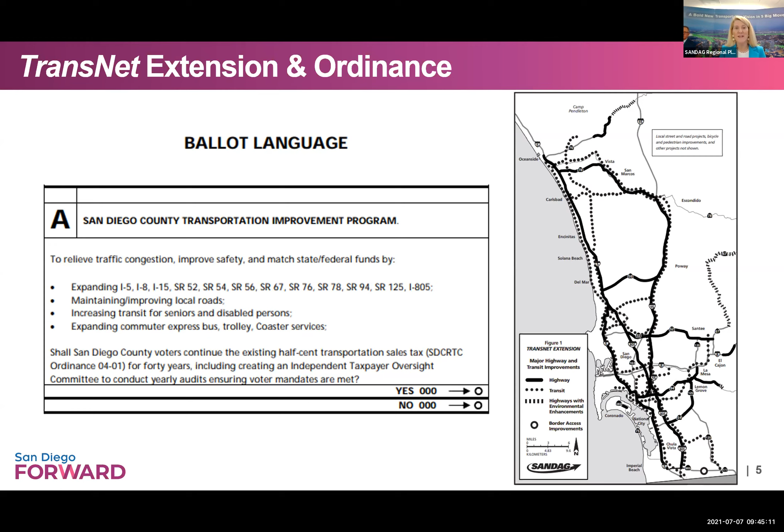We have completed a whole lot of projects, and maybe some of you have had a chance to look at our TransNet story map. More than 650 projects have been completed, and this is a combination of highway improvements, transit improvements, our environmental mitigation program, active transportation projects, and grants to our local jurisdictions for smart growth and for active transportation, as well as services for seniors and disabled persons. So 650 projects just since the TransNet measure was approved.

As you all know, the TransNet funds have many elements to it. Today we are going to focus on the major corridor capital projects and share with you how what's in the TransNet ordinance compares to what we're actually proposing in the 2021 regional plan. As Hasan mentioned, we're really talking about a transformational system approach to the region's transportation challenges, as opposed to a set of projects. And this is largely because things have changed dramatically in the region. Ray Major is going to share with you some of the trends in land use and how population projections and our revenues are some of the major changes.

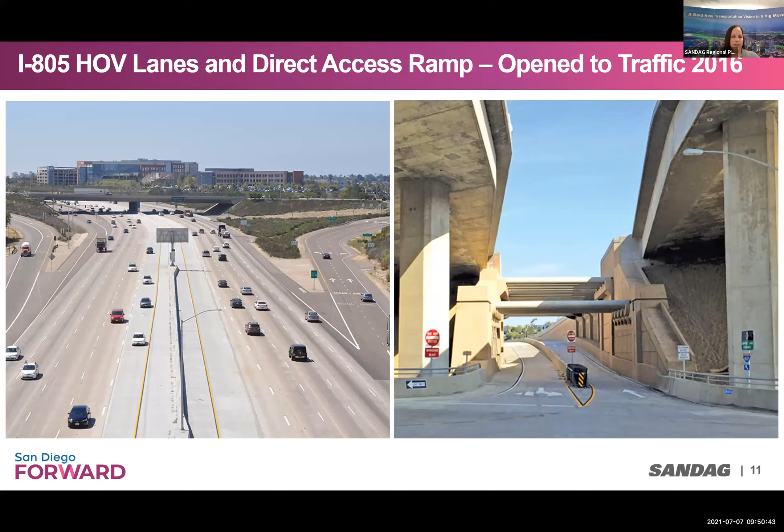These facilities provide new transportation choices for people who live, work, and play in the Golden Triangle area, which is also a leading employment center in San Diego County.

This picture is of the 52 extension, which was completed in 2011. Some of the great things that resulted from this project include reduced congestion on I-8, Mission Gorge Road, Mast Boulevard, and Prospect Avenue. Reduced congestion on I-8 as much as 20%, direct access to job centers from East County communities, improved mobility by increasing roadway capacity, and travel time has been reduced by approximately 10 minutes.

3 projects along the SR 76 corridor have improved travel times for commuters in North County. The west segment was completed in 1999, and the middle segment, completed in 2012, reconstructed the 2-lane highway between Melrose Drive and Mission Road into 4 lanes.

The east segment, completed in 2017, widened SR 76 to a 4-lane highway between Mission Road and I-15, improved the SR 76 I-15 interchange, and upgraded the park and ride at Old Highway 395.

These projects along the 76 corridor included physical improvements such as widening the roadway, expanding the park and ride, and improvements to existing on-off ramps to improve traffic operations and efficiencies.

Safety enhancements, which included creating a median barrier, realigning the curves, and widening the shoulders. Environmental benefits of these projects included facilitating wildlife movements through animal undercrossings, mitigating stormwater runoff, and restoring and revegetating habitat areas.

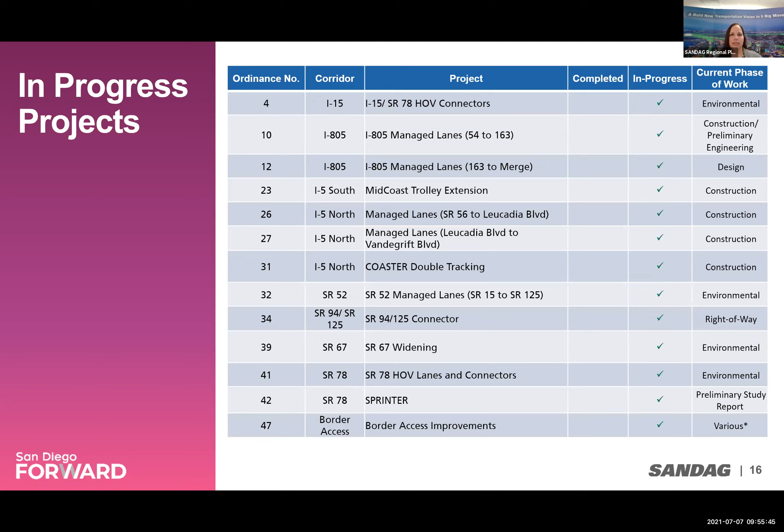The first project is, of course, the Midcoast project, which you may have heard of. We are very excited to see this project opening at the end of the year so that trolley riders will be able to ride the trolley from the border to UCSD and anywhere in between.

This picture shows the aerial guideway with the elevated station and tracks. This picture, a little bit more south along the I-5, shows the progress at Noble Drive trolley station along with the parking structure. On a quarterly basis, staff brings updates for the Midcoast project to the Transportation Committee and the ITOC. These presentations provide an update on the construction, schedule, and budget, and provide great pictures like this one.

Build NCC includes the restoration of the San Elijo Lagoon. The restoration project is being made possible by the TransNet EMP, or Environmental Mitigation Program, that I spoke about earlier, coordinated with the San Elijo Lagoon Conservancy and resource agencies.

Restoration will enhance the lagoon's wetland and upland areas, improve tidal flushing, and includes beach and sand replenishment. Improving coastal access is a critical component of the NCC program. Build NCC will include new east, west, and north-south bicycle and pedestrian trails in and around San Elijo Lagoon.

Caltrans and Sandag are extending an HOV lane on I-5, one in each direction, from Lomas Santa Fe in Solana Beach, to State Route 78 in Oceanside.

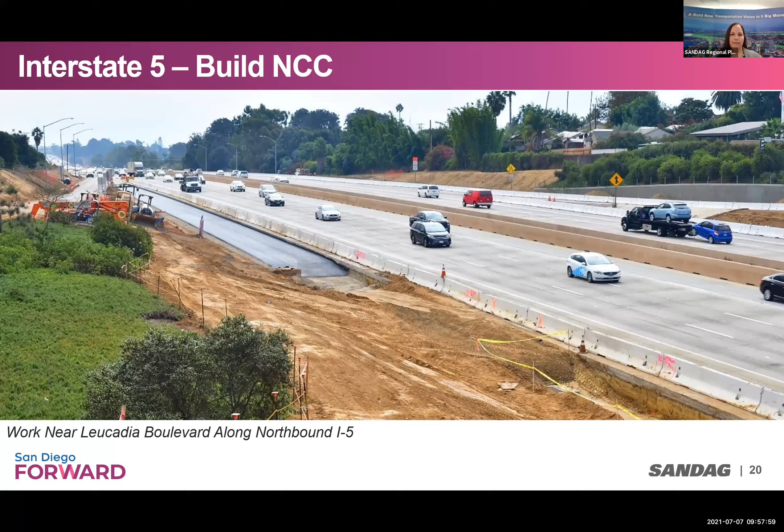Some projects within the North Coast corridor have already been completed. This includes the I-5 Genesee interchange and widening project. As shown in the first picture, this project replaced the existing 6-lane Genesee overpass with a 10-lane structure able to accommodate current and future traffic demands. Along with replacing the overcrossing, the project widened the freeway access ramps, added an auxiliary lane northbound on I-5 between Genesee Avenue and Roselle Street, and constructed a new separated bike-ped path.

The second picture is of the Gilman Bridge over I-5. In partnership with Caltrans and UCSD, this bridge connects Gilman Drive to Medical Center Drive, providing a vital link between the west and east campuses of UCSD.

On a quarterly basis, staff brings updates on the I-5 North Coast corridor to the ITOC, and these presentations provide updates on construction, schedule, and budget, along with pictures and current project statuses.

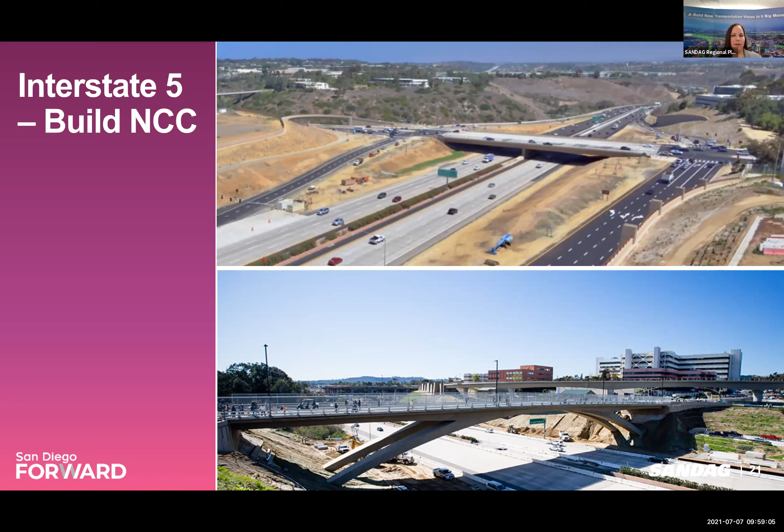The Los Angeles, San Diego, San Luis Obispo Rail Corridor, referred to as the LOSSAN corridor, is the 60-mile segment of passenger rail in San Diego County, stretching from the Orange County line south to San Diego's Santa Fe Depot. The segment passes over 6 coastal lagoons and Camp Pendleton, and goes through Oceanside, Carlsbad, Encinitas, Solana Beach, and Del Mar before reaching its final destination in downtown San Diego.

As of March 2021, approximately 45 miles, or 75% of the corridor, is double tracked and in service, with 7 miles of double tracking either in design, environmental review, or construction.

This slide shows a snapshot of the LOSSAN story map, highlighting projects that are complete or in various stages of development. Each year, more than 2.8 million intercity passengers and 4.4 million commuter rail passengers travel the LOSSAN corridor. In addition to double tracking, other infrastructure improvements include bridge and track replacements, new platforms, pedestrian undercrossings, and other safety and operational enhancements.

As a companion to the I-5 freeway, the San Diego segment of the LOSSAN corridor plays a critical role in the movement of goods and people within the region's North Coast corridor.

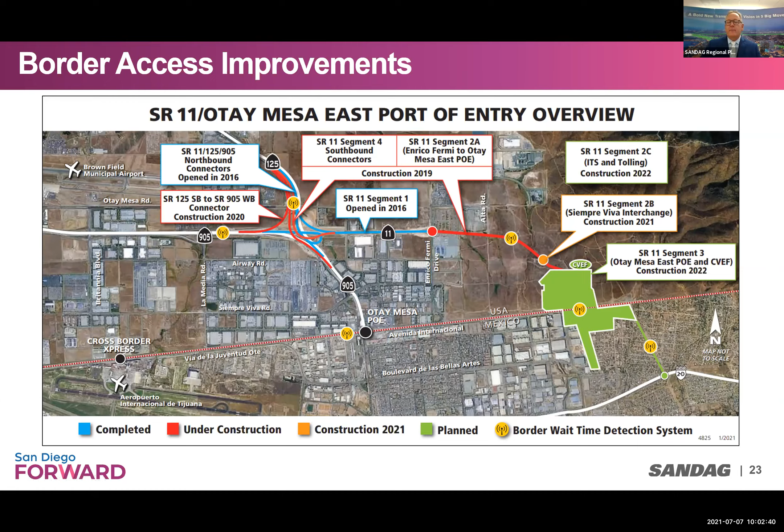650 projects completed under TransNet. I think that's actually really amazing. And when you think about the highlights she went over, we've done a tremendous amount in this region. As you can see, a lot of them were capacity-adding projects. The reason for this is that when we looked at our transportation network 20 years ago, one of the things we were judged on by the state of California was something called level of service, which had to do with how fast or how much congestion there was on the freeways. Our job was to mitigate that, and the easiest way to do that is to widen freeways. That's what you saw a lot of happening over the last 20 years.

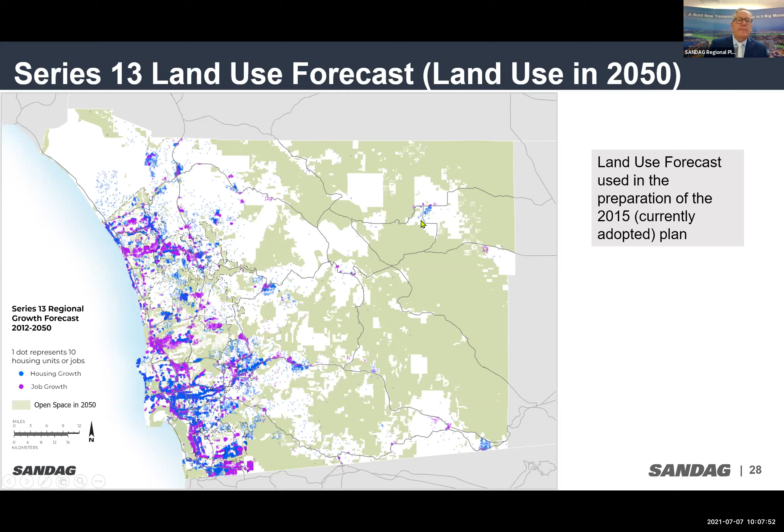The important thing to note here is the growth that we believed was going to happen along the 8 corridor, and the growth we believed would happen in the area represented by Ramona, a little bit north. You can see it's still spread out, with pockets of growth out in the East County.

Series 14, the land use forecast we used for 2021, looks completely different. This is important because we take the land use from each jurisdiction within San Diego, working with the planning departments, taking the land use they're proposing, and aggregating all of that. That's the beginning of what our forecast uses to figure out where people are going to live. These two maps compare Series 10, from TransNet 2, to Series 14, the one we're looking at for the future.

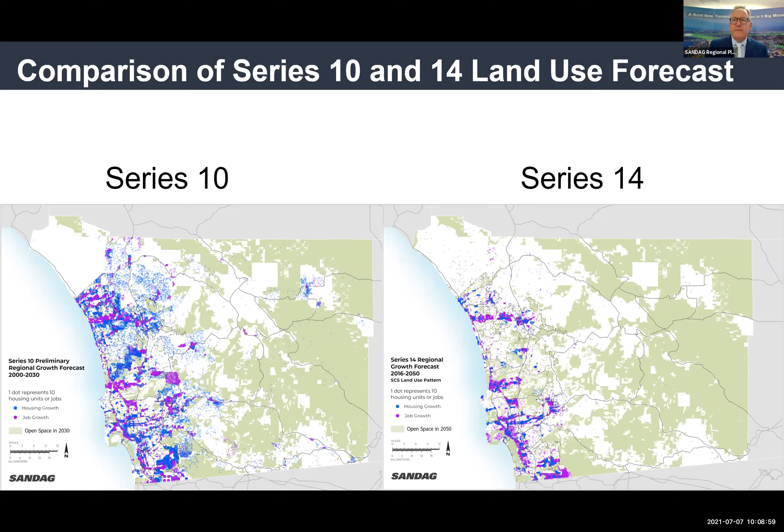What you see is very little growth in the East County in the Series 14 map, with much more growth concentrated in existing areas. The important thing is that a transportation plan conceived 20 years ago in terms of what would have been the right projects probably isn't the right set of projects now, given where we believe growth is going to be. There are two completely different land use patterns requiring two completely different solutions to transportation.

There are some other things we need to take a look at too. Back in 2002, when we originally did the TransNet extension, we believed we'd have around 4.45, about 4.5 million people in the region by 2050. This is an extrapolation from the forecast, since it only went out to 2030, but using the same algorithms, we'd have about a 4.5 million population.

And we need fewer housing units to house those people. So the region is not growing as fast as it was in the 2000 forecast, and it's not spreading out as far geographically. These are the forecasts now that have been updated. I wanted to share those with you so you can see that for planning purposes, we're really planning for a completely different region.

As Hasan mentioned, our annual TransNet revenue forecast done in 2002 was used for the measure passed in 2004 and implemented in 2008. For those first couple of years, that 2002 forecast was very accurate, basically right on. So economists and everyone else here at SANDAG at that time felt pretty confident this forecast was reasonable. They had a total of $14 billion expected from this half-cent extension.

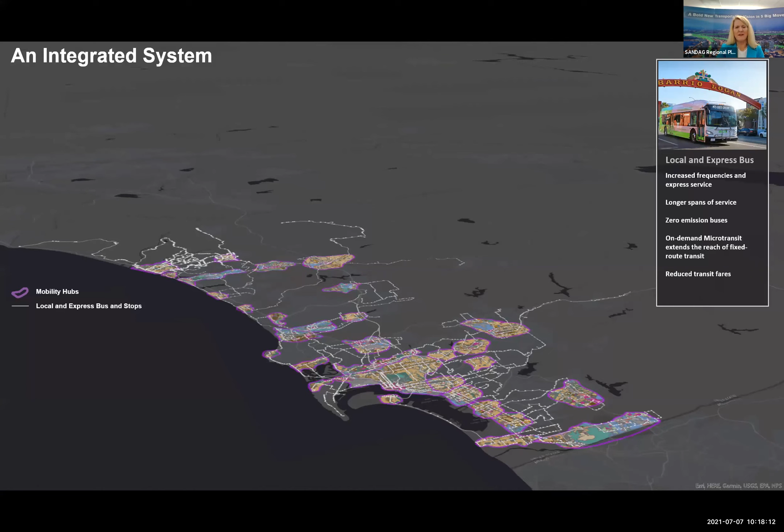This next layer shows improvements to local and express bus service. This is the kind of service available within urbanized areas, and it can also connect with areas to bring people into more central locations.

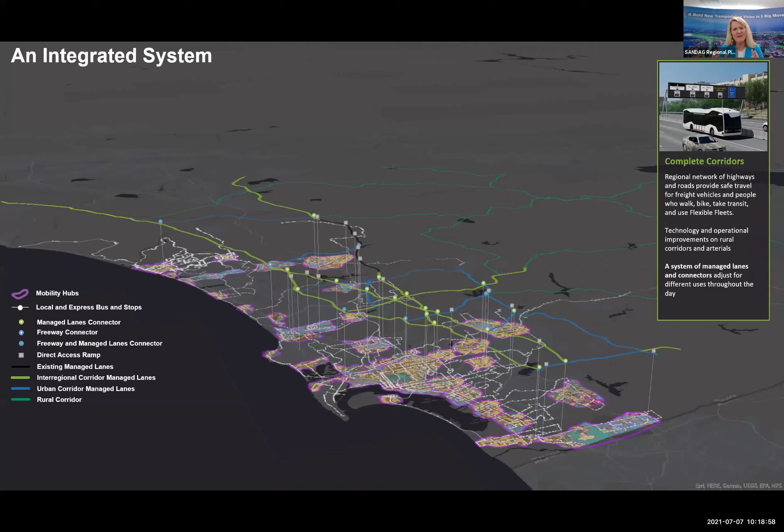The next layer is the complete corridors - looking at existing infrastructure, our existing highway network, and incorporating managed lanes like we see on Interstate 15. We have so many great examples of projects in the San Diego region that we can spread throughout the system, applying the managed lane system throughout the highway corridors within the existing right-of-way - repurposing shoulders and some existing lanes to allow for managed lanes that support high-speed transit and goods movement, and applying technology to maximize use of these facilities.

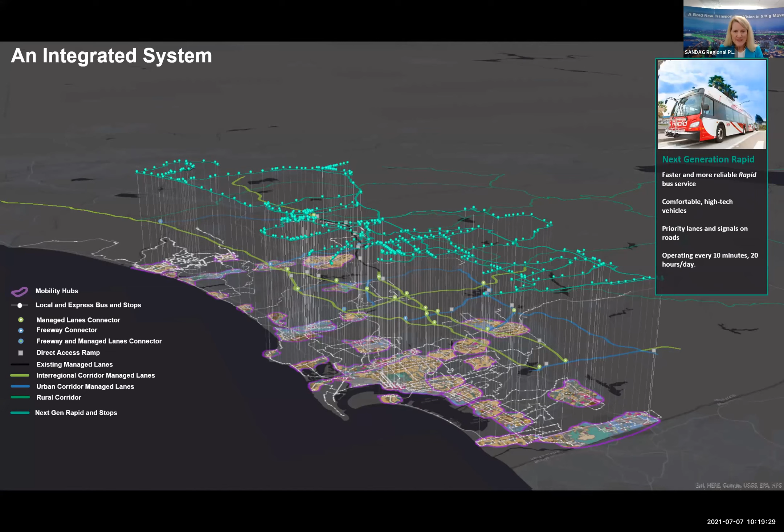Next is the next generation rapid - higher speed transit service given priority, whether on managed lanes or larger roadways within local jurisdictions, with separated lanes for transit and signal priority so that transit is truly moving faster than if you were driving in your own car.

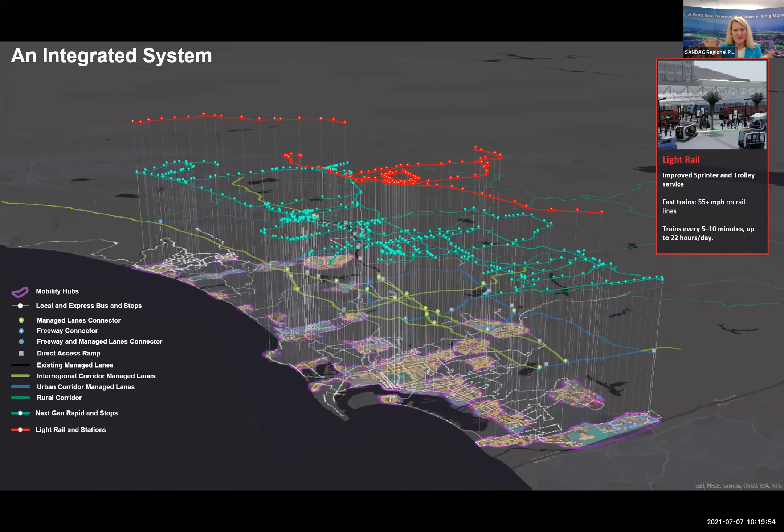The next layer of the system is our light rail - the Sprinter and the trolley. The regional plan envisions more separating the light rail from vehicular traffic, what we call grade separations, along with giving signal priority. The big new concept here is a high-speed commuter rail system.

Like we see in Los Angeles, Seattle, and other major metro areas, the goal with the higher speed commuter rail system is to take people from larger population centers and get them to major destinations or employment centers. This is the system that makes the most sense for places where people are making the most trips that could be consolidated into a higher speed transit system.

When you put all this together, we end up with 10,000 connections being made. This really facilitates true travel options for residents of the region. It addresses congestion because people have travel options to utilize, and it helps with social equity by providing viable transit options from some of our most vulnerable communities to get to higher education, higher paying jobs, and quality healthcare. This is what this integrated system really allows.

I'm going to go through each of our major corridors - this isn't really an apples to apples comparison, but just to give you a sense of what's in the TransNet ordinance and how this has been re-envisioned in the regional plan. This is all attachment 1 in the staff report. I'll go through this quickly, and we're happy to come back and answer any specific questions.

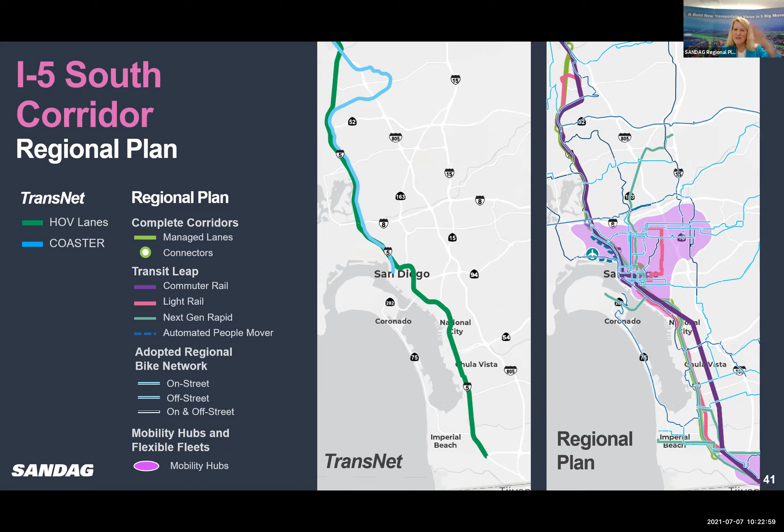When we go a little bit further, we can look at the active transportation network. This really helps to facilitate what we call the flexible fleets, as well as people biking and walking, and a fully integrated, layered system depending upon the type of trip that someone is going to make.

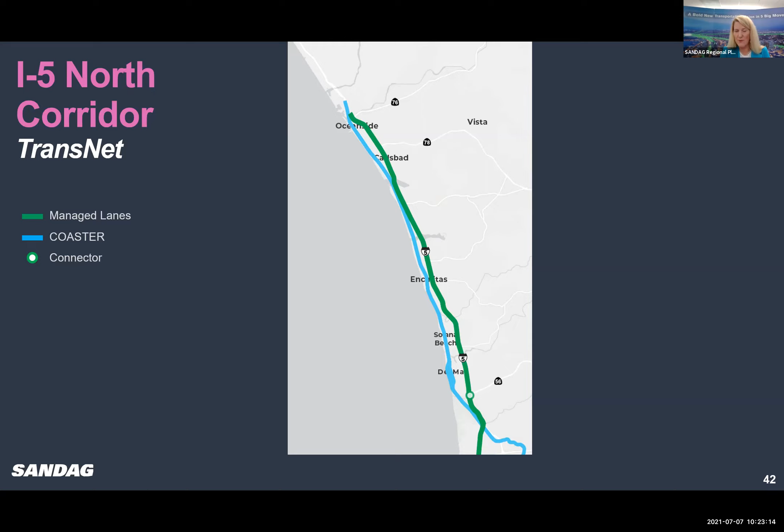When we look at the I-5 North Coast corridor, the TransNet ordinance laid out managed lanes on the northern part of Interstate 5. Some of that is already under construction today, the double tracking on the coaster. As you look at what we have proposed in the regional plan, it's applying managed lanes, actually adding managed lanes to I-5. Right now we're working on the HOV lanes in the North Coast Corridor project, so turning those into managed lanes and adding another managed lane, so we have that fully connected system of managed lanes.

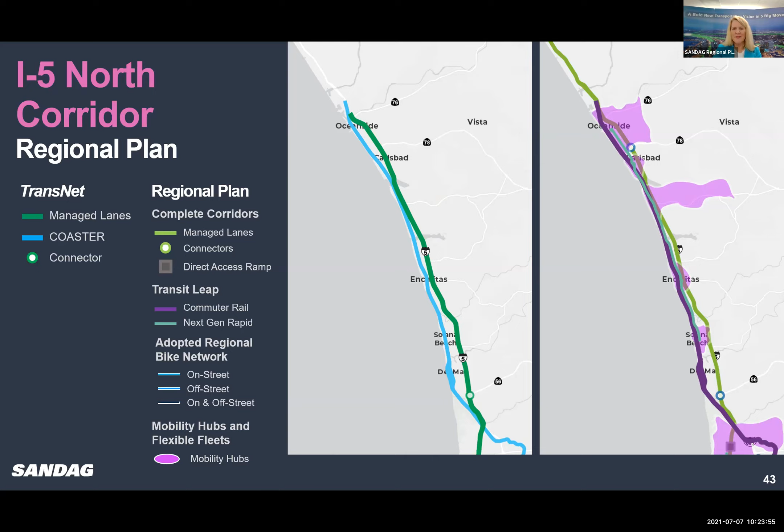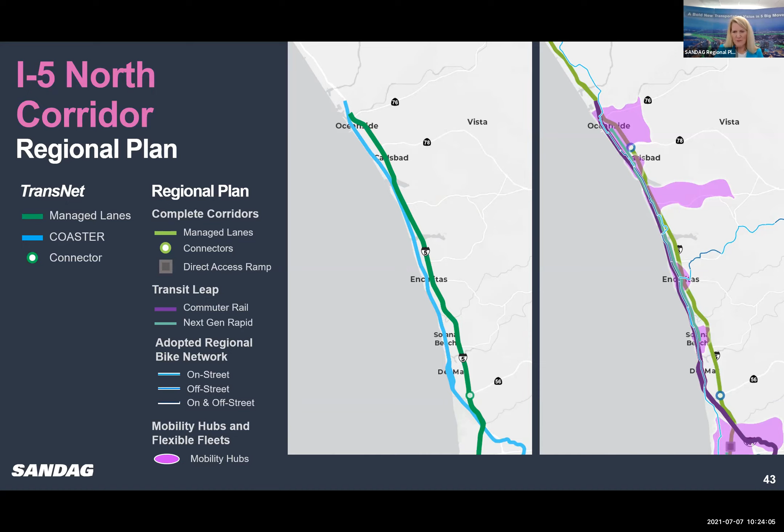Again, the improvements along the coaster, which deal with the Del Mar Tunnel and getting rid of that big Miramar curve that slows down the coaster travel time. And then again, adding in the bikeways and the rapid bus service, parallel service, so that we have lots of options for people and serving all of these mobility hubs.

The I-8 corridor, we just had 2 general purpose lanes in this little part of Interstate 8. And granted, this is just what's in the TransNet ordinance, but looking at Interstate 8, same thing: managed lanes, 2 managed lanes in each direction on Interstate 8.

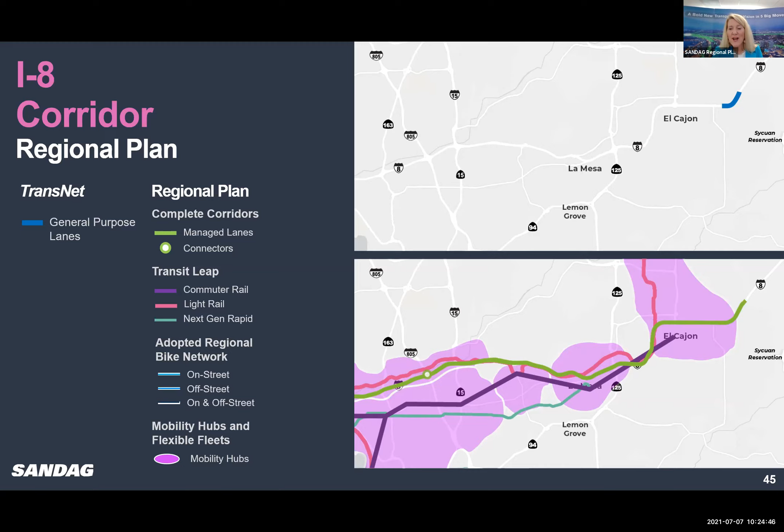Then looking at the mobility hubs, these are major centers in our community that Interstate 8 goes through, from El Cajon, and then all the way to Mission Valley, and then on into downtown San Diego. And so managed lanes, adding in, again, commuter rail that goes from El Cajon all the way into downtown San Diego, parallel improvements on the light rail, as well as next generation rapid in this corridor. This is one of the most heavily traveled corridors in the entire region, and therefore requires really a system approach.

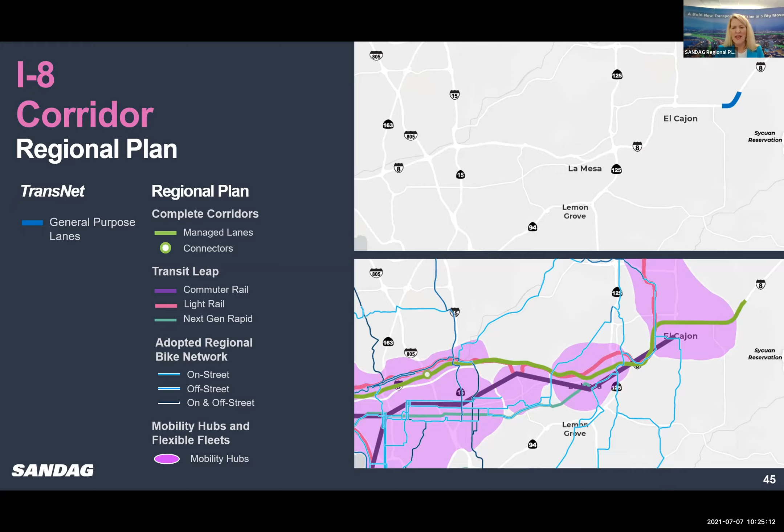And again, a whole bunch of active transportation bikeway improvements that also facilitate bikes, peds, and our flexible fleets.

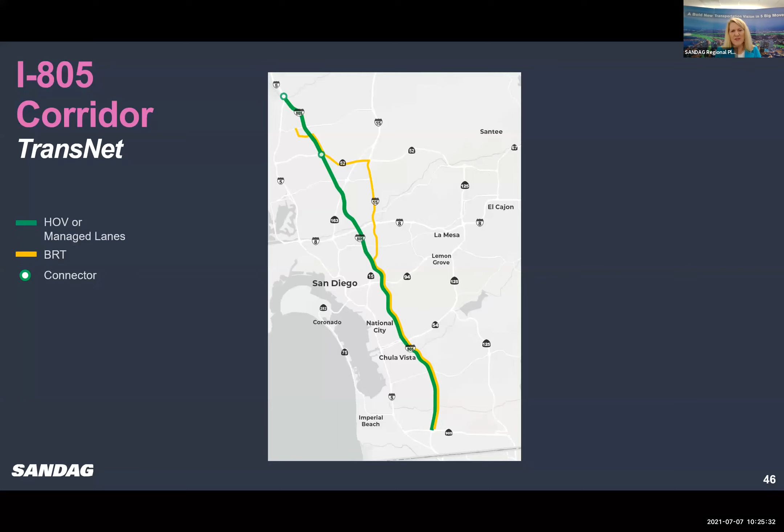I-805 corridor. So this, again, in the TransNet ordinance, we're looking at carpool lanes up and down 805, as well as a rapid bus service that runs partially on 805, as well as Interstate 15 and crosses back to the west on SR 52. What do we have in the regional plan? Again, it's looking at 2 managed lanes in each direction on 805 within that existing corridor.

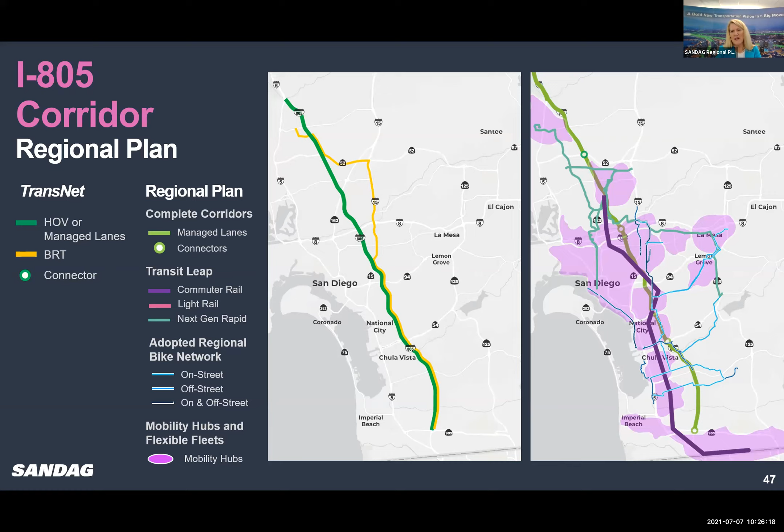Look at all the mobility hubs. These are the dense population centers as well as the employment centers. A new high-speed commuter rail system here connects from the cross-border terminal east of San Ysidro, connects into San Ysidro, and then again up to hit major employment and population centers, including our major employment centers in Kearny Mesa and Sorrento Valley. Also adding a significant number of active transportation bikeway projects, as well as rapid bus services.

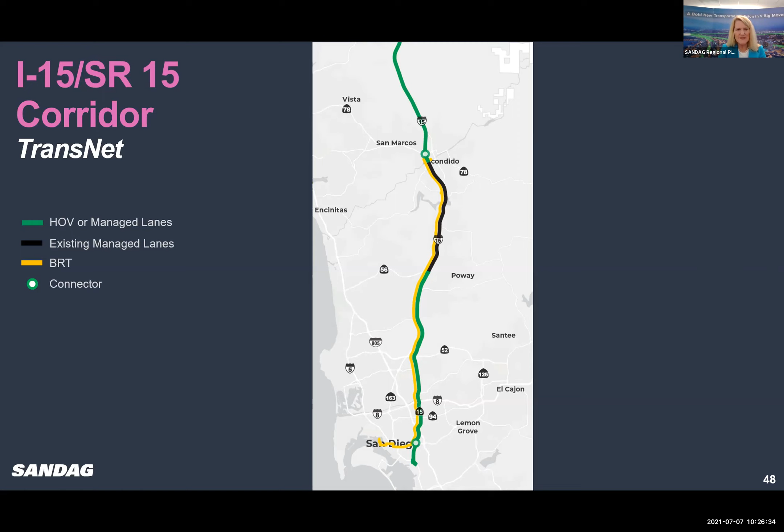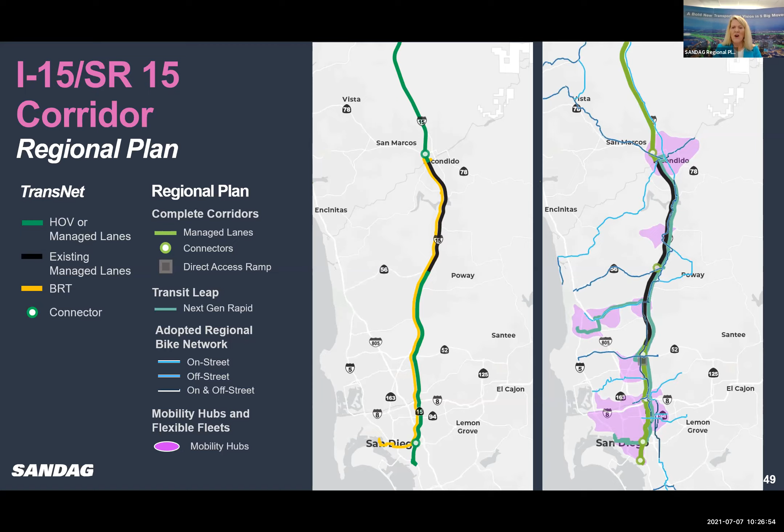The I-15 corridor, again, a great example of managed lanes that we're looking to apply throughout the region, as well as a rapid bus. This is what was in TransNet. And then as we look at how this is envisioned in the regional plan, it's again taking that whole managed lane concept up and down State Route 15 and I-15, looking at where the mobility hubs are, running the next generation rapid here, and all the east-west bikeway connections as well.

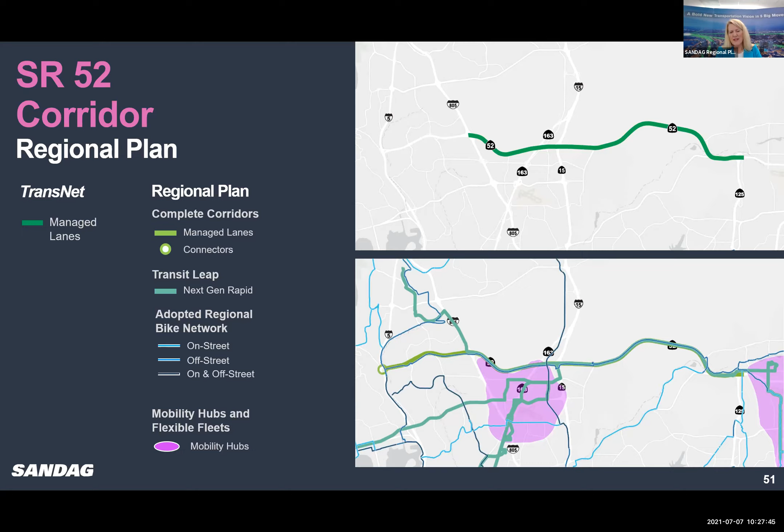So then, as Michelle had talked about in some of our other projects, given the flow of traffic, we would have a movable barrier. So in the morning you'd have 2 directional managed lanes going to the west, and in the evening you would shift that barrier and allow those 2 lanes to be available going to the east. Also running a number of next generation rapid services on the corridors nearby, as well as major investments in the active transportation system.

State Route 56 in TransNet, we had talked about 1 new lane in each direction. Here we're looking at managed lanes on State Route 56. Phil, don't we end up with 2 managed lanes plus a 3rd one with a movable barrier? Yeah, 3 total.

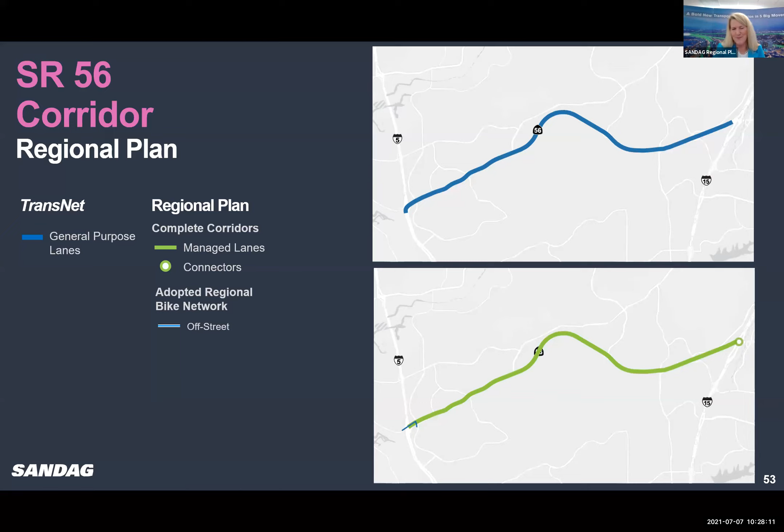So 3 total there. Probably one of the more complicated ones is the State Route 67 corridor. What we had in the TransNet ordinance was to add a new lane in each direction on State Route 67, but given the changes in laws, it makes it very difficult for us to do that.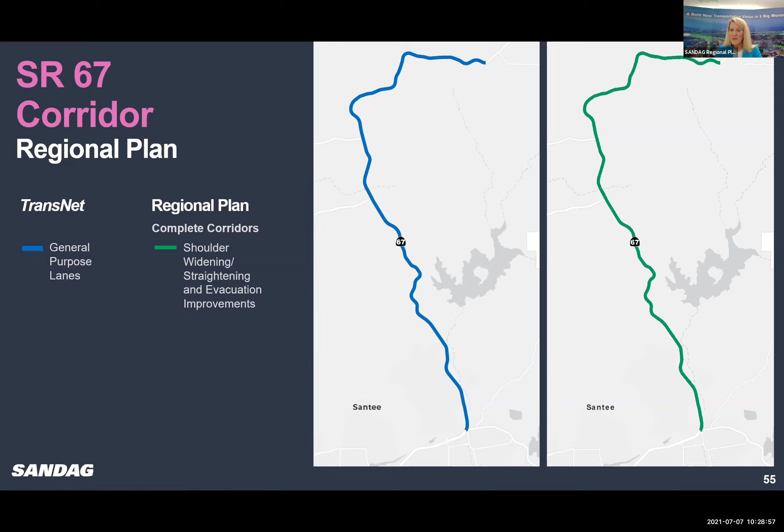So what we are proposing on State Route 67 are a number of improvements to help address safety: straightening really tight curves, widening shoulders so there are safer places for people to pull off the road, providing true evacuation routes, and technology in terms of signal timing so we can prioritize traffic flow at certain times of the day.

So with that, I'm going to wrap up with the State Route 78 corridor. What had been envisioned in the TransNet ordinance was 1 managed lane in each direction on the 78, a rapid bus along Palomar Airport Road, and some station improvements along the Sprinter. When you look at what we have in the regional plan, it's actually 2 managed lanes in each direction on State Route 78.

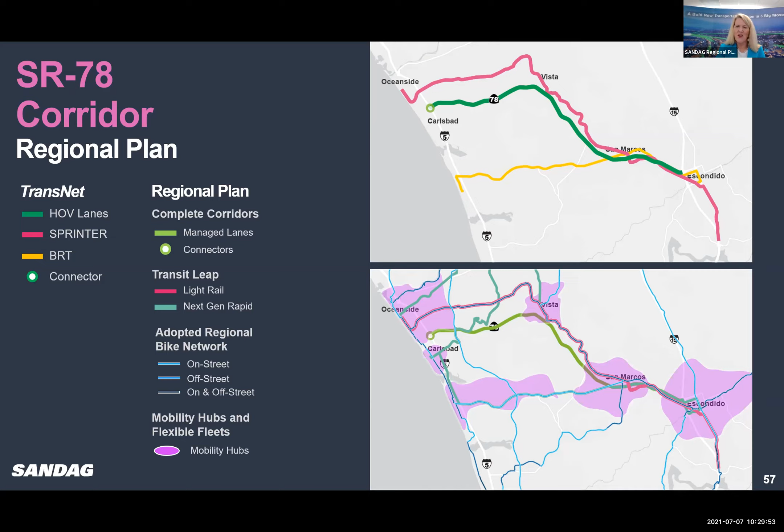Looking at the population and employment centers being served, and including flexible fleets in those areas, as well as the next generation rapid, not only on Palomar Airport Road but several others connecting from the university through Vista and San Marcos. A number of bikeways and active transportation projects are also here. So really layering all the different transportation improvements into an overall system.

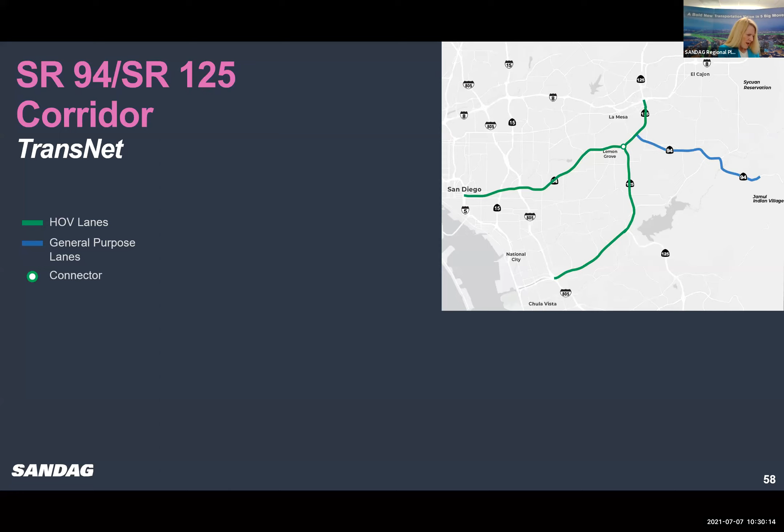On State Route 94 and State Route 125 corridor, we had identified HOV lanes in the TransNet ordinance, with some general purpose lanes on State Route 94. What we have in the plan includes 3 managed lanes on 94, really doing the kind of movable barrier we talked about.

State Route 125 would have 2 managed lanes, repurposing that into managed lanes, and the direct access ramps that are missing there today that are so important. Then intersection improvements all around along the rural part of State Route 94, and many of the safety and technology improvements I mentioned for State Route 67, along with serving the mobility hubs in this area and a number of improvements for active transportation.

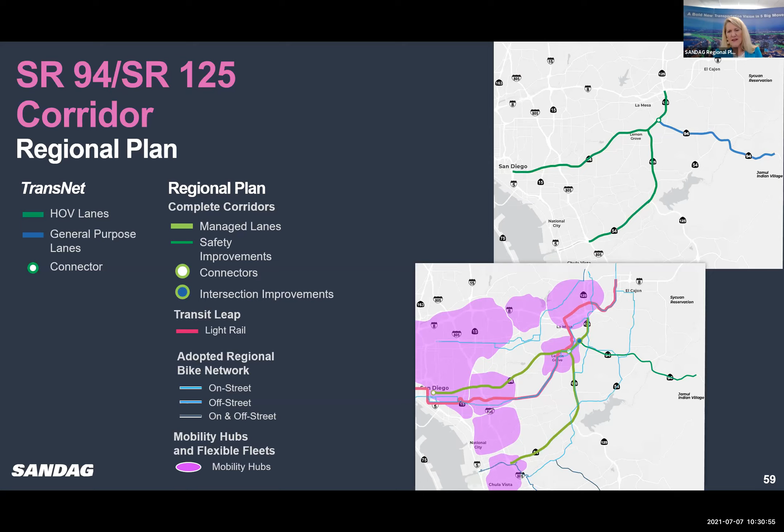So I hope this has provided the picture for you of an overall integrated system that brings together land use and really scaled type of transportation to help us with all different kinds of trips in the region, whether they're short trips or long trips. This is really the system that helps us get around.

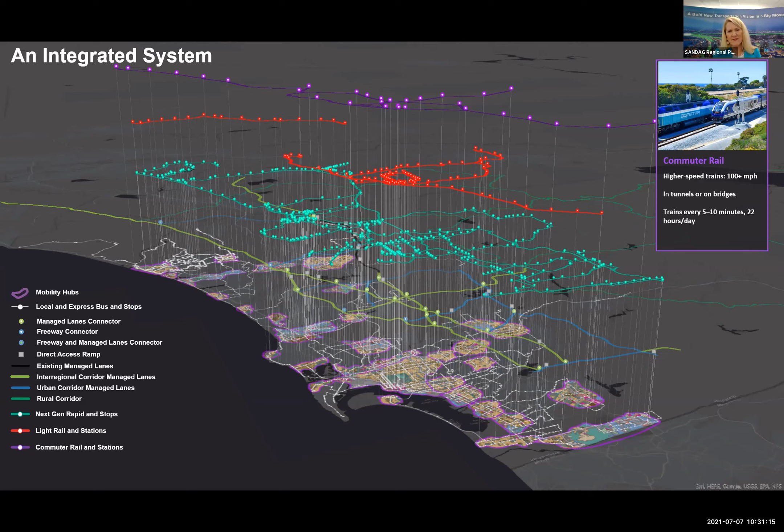In terms of our timeline, our public comment period has been extended through August 6th. Later this summer we will release the draft EIR, and this fall we will be asking the SANDAG Board of Directors to adopt the plan and certify the environmental impact report. I'm just listing here all the different ways comments can be provided to the SANDAG team, and we really appreciate your time here.

And I'm going to turn it back to Hassan to wrap up. Thank you, Colleen. Thank you, Ray and Michelle. Chair Kenny, honorable members of the Oversight Committee, you heard from the staff the system approach. Every single corridor in San Diego County was addressed to achieve the goals of not only congestion and meeting the mandates, but social justice and social equity.

I've been here about 2.5 years, and when people ask me what's my main job, I say with my team we're going to allow San Diegans to dream the best transportation system in the world. We hope that our leaders, including yourselves, help San Diegans achieve those dreams and do it in a responsible way, in such a way that it's going to yield results.